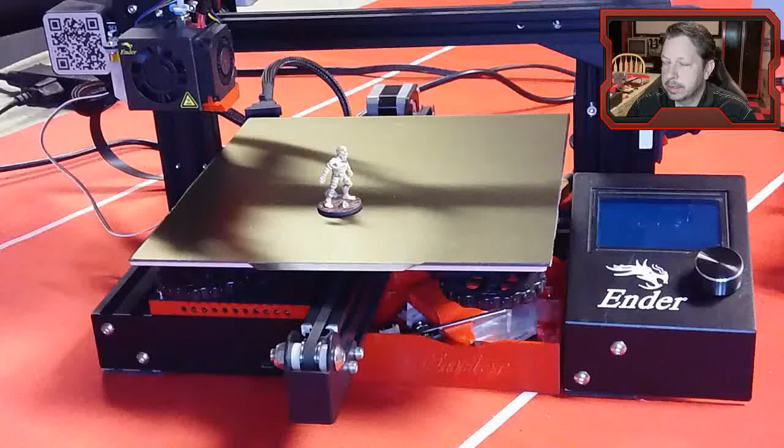All right, I think we've got a couple of new things for today. We're going to look mainly at joining pieces together. We'll look at our little guy that we made last time. I painted him up just to see what he would look like.

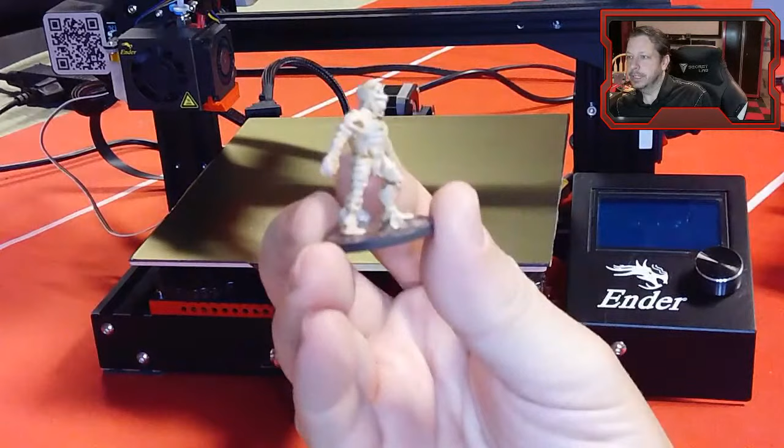He did work out, except our support material is a little bit too close. Remember, he had to be supported, like his arms needed to be supported. There he is. His arms had to be supported so that they wouldn't just print in midair.

Removing that support material was a little bit tough, so we're going to need to make some adjustments to the distance between the tip of his fingers and the support material, because right now it's printing just a little too close, and it caused him to break.

I did glue him back together, which actually fits in with what we're doing today, because we're talking about different ways you can join your prints. Not all of them are gluing, but for this guy, not much you can do, because where he broke, you can't really tell too much.

He broke right down there in his leg area, down in there. You can kind of see, I guess, maybe, you can probably see the one on his back foot back there, a little seam.

But he's a mummy, so it doesn't really matter — that's a good thing about printing mummies, is they don't really get too bad when they're all torn up.

It did work though. We just need to adjust our support settings so that they're a little bit easier to remove, because these were a little bit too tough, a little too dense.

But this is kind of the thing there where we didn't paint the bottom, that you can do pretty easily. That was in our mesh mixing exercise, where we just took some models we found off of Thingiverse, mixed them together, chopped them up a little bit, and now we have a new piece that we didn't have before.

So those are the kind of things you can do with mesh mixing. You don't have to be able to create geometry from scratch, go into SolidWorks and create things, or go into Tinkercad and create things. We'll talk a little bit about Tinkercad in particular.

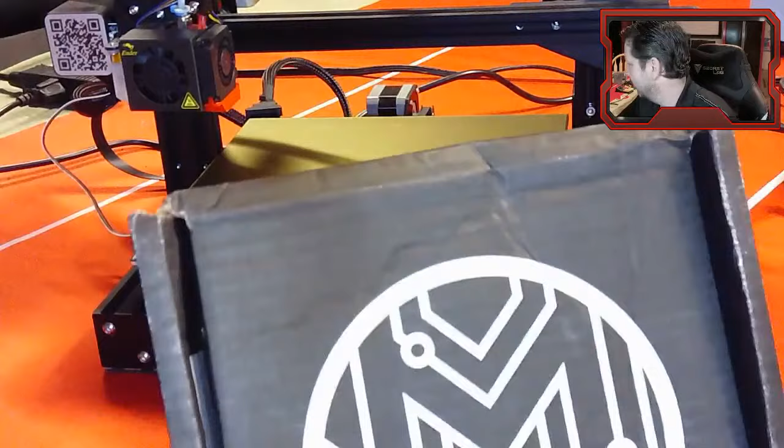I also got another box. It's pretty beat up, but I got another box of sample filament, so I thought we'd open that and see what's inside it. Let's see, where's even the front of this thing?

It's kind of hard to tell now. I think this was supposed to be the front. There we go. All right.

So this is how they normally show up — let's see if we can get it in there. There's usually some announcement about, oh, this is the program where if you refer three people, you get a free box. So this time we have ABS low odor. I've never printed ABS low odor, so I don't know exactly what that is.

The temperatures are a little bit cooler than what you would normally find with normal ABS. Normal ABS you usually have to print a little bit hotter, or at least at the upper end of this. It doesn't list a bed temperature — that's interesting. Normally with ABS you have to have a heated bed for sure, and heated chamber even.

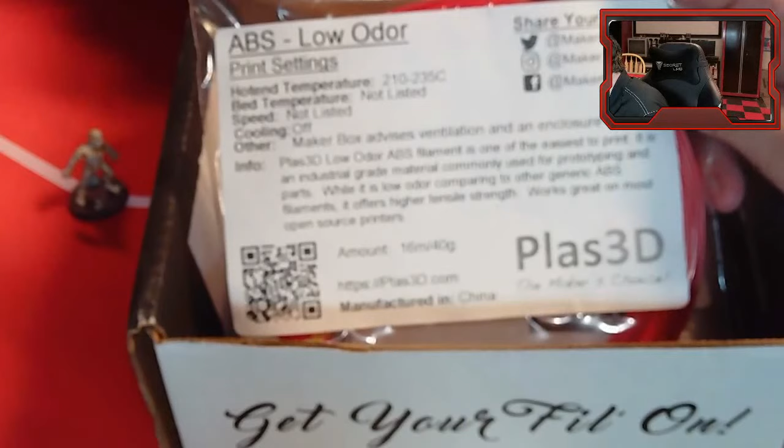It says it's easy to print, and it works great on most open source printers.

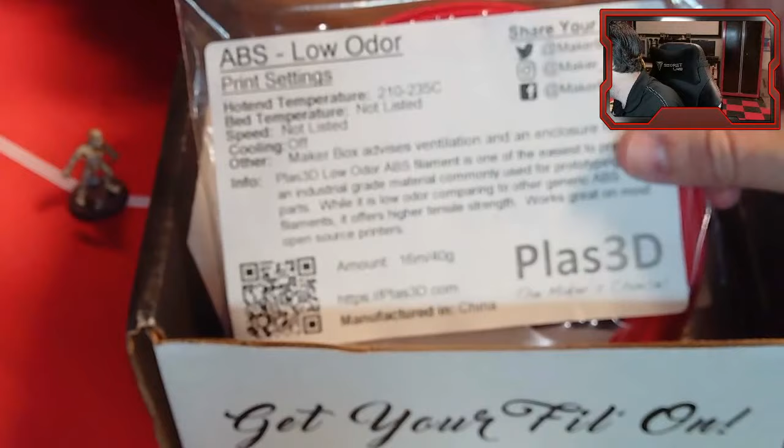I don't know, maybe we'll try that later on and see. I don't think so — the ABS stuff is generally kind of tough to print in a chamber that's not enclosed, which our Ender 3 is. Let's see if we can get that to focus a little better.

Oh, here's some PET material. This one's printing pretty hot, 230 to 250. So the 230 — remember we didn't do a PETG temperature tower. Bed temperature is pretty high too.

So to print this, according to their numbers here, it's going to be at the upper limit of what your Ender 3 can do, at stock anyway.

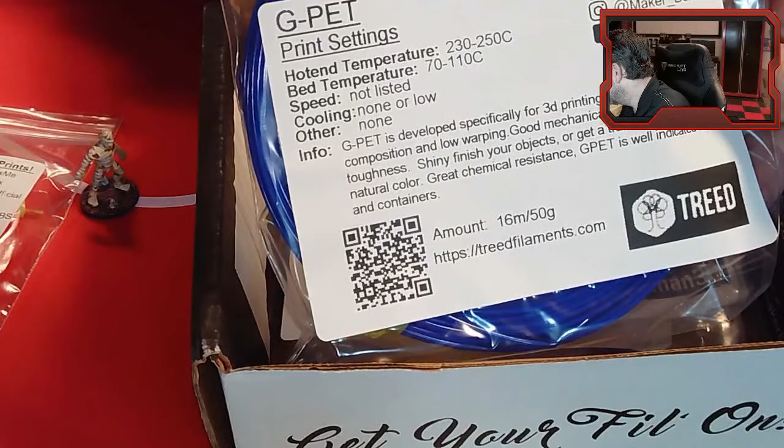Odorless composition, low warping — they misspelled strength. A shiny finish, which is kind of typical of PETG, or in this case it's GPET.

Translucent look with a natural color. Well, interesting, we got a sticker. Oh, here's a clearish one. I've not heard of this one, Alloy 910.

This one's printing pretty hot. Now this one says 45C with PVA. What that's talking about is it might need a support material, or I guess they're saying... this is interesting, it says PVA glue stick will work.

Okay, I read that as will not work. All right, so PVA is basically meaning Elmer's white glue type stuff, and the glue stick will work. Just most glue sticks are also PVA. So it's saying you need that as a release agent or an adhesive, I don't know which one. Probably a release agent between the print and the bed.

Let's see, the goal was to provide a super material with very high tensile yet sufficient elongation. So basically it's pretty tough material. It says it has 8100 psi tensile, I assume that means tensile strength. That's, you know, decent for a printed part. Actually that's really good for a printed part. Now this does not necessarily mean that the layers adhere that well.

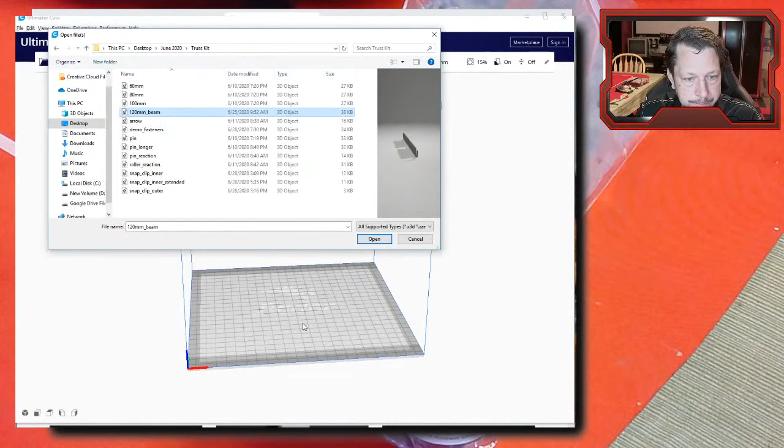Let's find a part. Where did I put one? I think there's some in here, in these truss pieces. There, yeah, that'll work. All right, so here's a little part. Now it's turned the wrong way right now, so we need to rotate it flat. Wow, I'm having trouble moving it. All right, there we go.

Now in our slicer settings, there are build plate adhesion settings, and we just have it defaulting to skirt. That's the one—well, I'm going to show you what it is. It won't take long to slice.

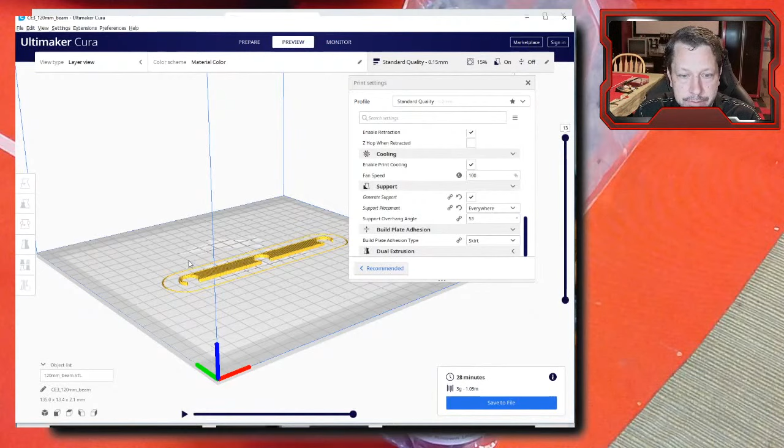All right, so if we look in preview, the skirt is this outer little circle, this couple of laps it makes around the part. You can use that one. It doesn't help with adhesion at all, but it helps you purge the nozzle and get your bed fine-tuned, maybe adjusting the bed level knobs or baby stepping or whatever. That's what skirt does. Let's go back and change it to brim.

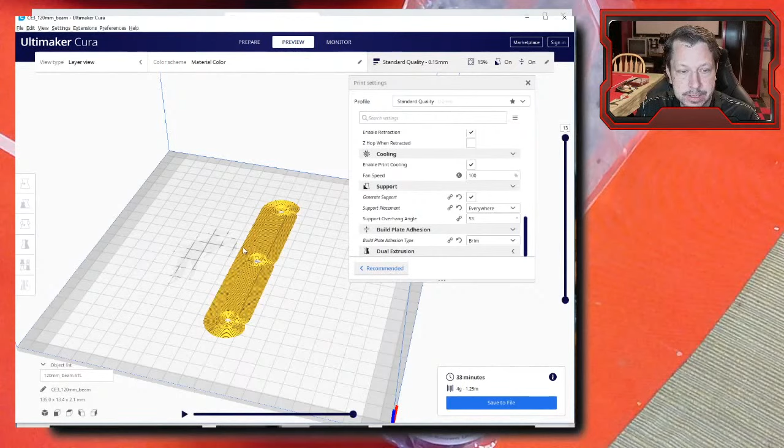And there's raft—we'll talk about that in a second too. Raft can also help with adhesion. So here's brim, and see how now there's all this area connected to the part. That can help with adhesion also, just having all this other material to contact the bed. But also, if you see this thing start to peel up, you can literally tape across it as it's printing and hold it back down.

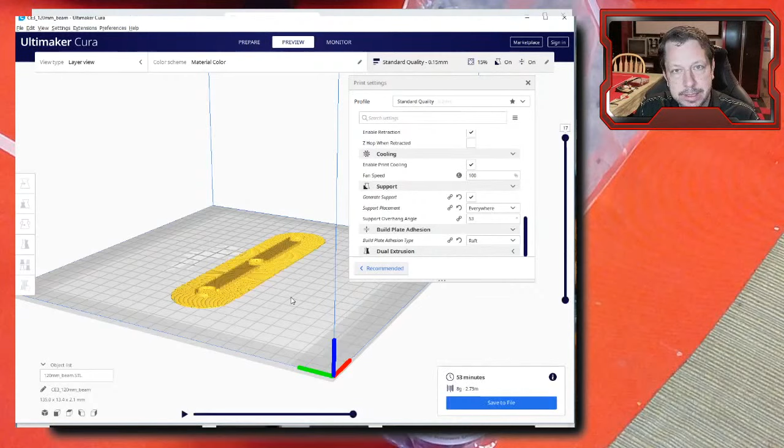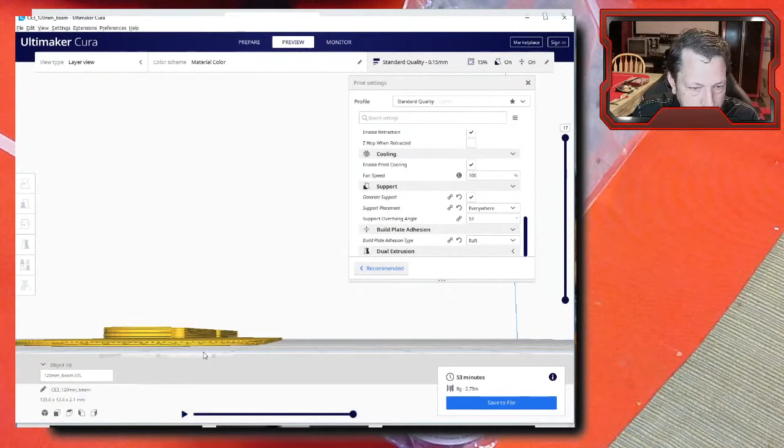Since we're here, let's look at the raft also. If you're having trouble getting your bed flat, this looks a lot like the brim except wider, but there's actually several layers to it. You can see here I've got 3 layers, or actually 4 layers. I assume there's an option to tell how many layers. But what they're doing is building an entire surface to print your part on. So this gives you a long time to get your bed printing and your extrusion rates right.

But it also kind of levels this section of the bed by printing directly on it, and all the unevenness happens in the raft that you're going to throw away later. So your print happens on top of the raft. It does add a good amount of time—look, we're at 53 minutes with the raft.

Without the raft, with the brim, we're at 33 minutes, so it added 20 minutes plus a good amount of material. We're at 4 grams with the brim. Let's see how many grams of material we're at with the raft. 8 grams, so we doubled the amount of material we're using. This is a pretty thin little part, but it does add a decent amount of material and time.

But if you're having trouble, it is certainly a way to basically level out your bed by printing on top of it, knowing you're going to throw away this piece that might be all sorts of unlevel and have ugly finishes on it, but you don't care because you're going to throw it away. You're just going to print on top of it and then throw it away.

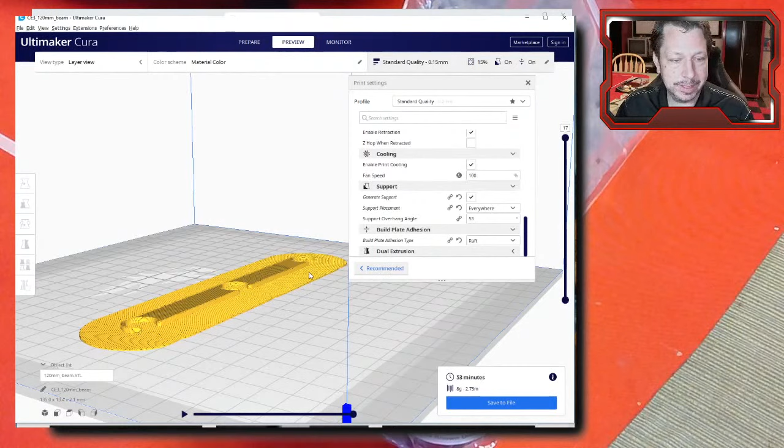All right, so let's see. I don't really have a lot of protective gear on, but I'm in a pretty well ventilated area, so let's just see if I can find some stuff that we might use, if I can get all the screens to go away. Let's see which other one is in the way. Oops, not that one. There, all right, we got them all.

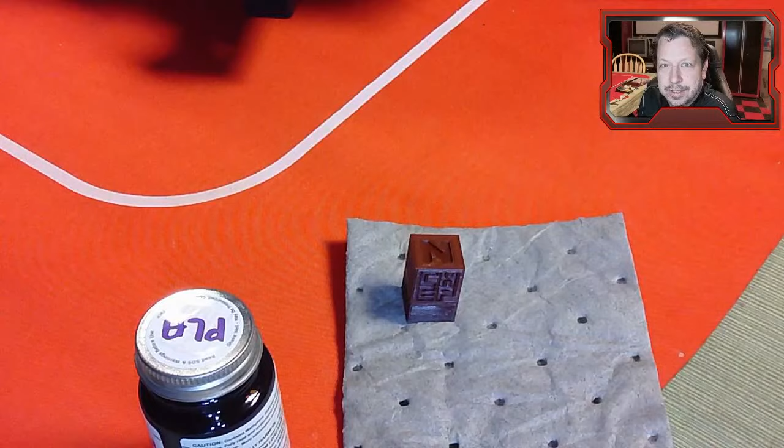Nothing in particular, basically. Oh, I was supposed to shake it. There's not much shaking happening there. All right, so it's tacky enough that it holds itself in place, and it felt like it was one of those types of glues that actually goes in and does melt the material. It doesn't tell me over here how long really for it to set up, but we'll come back to it in a second and see what it's like.

Now again, this is an older one, I don't even know if it has a date on it. No, it does not that I see. But this is one of the original, I can't remember if they did a Kickstarter or what, but it is one of the original bottles of it, so it could be that it's going to need a little more time than what they currently offer. It didn't smell though. I didn't smell it directly, but it didn't have enough vapor that it was bothering me from here.

It's pretty solid, I don't know if it's completely set. I could rip it apart. I do see where it would delaminate, but it is certainly pretty solid. We'll let it sit a little longer. You should clamp it. In fact, let me get a clamp and do that.

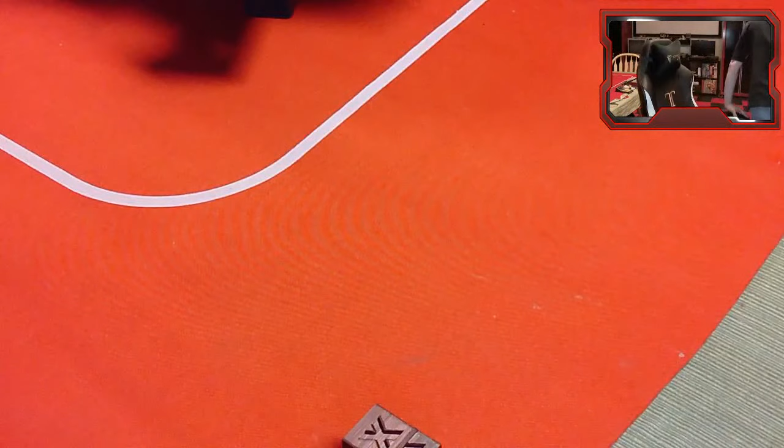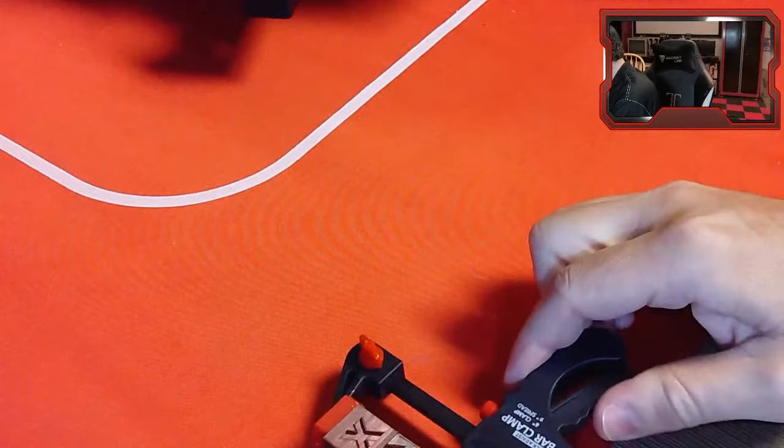Here we go with these little clamps. Most adhesives that melt things generally do well when you clamp them together. Of course, if you clamp too hard, if there are things that are melted, you might squish a little bit. So that's one thing, PLA Goop.

Here's another one, this is Plast-I-Weld. It's the same type of thing, but much thinner. It's very watery, whereas the PLA Goop was really thick. This one is more for very precise types of things.

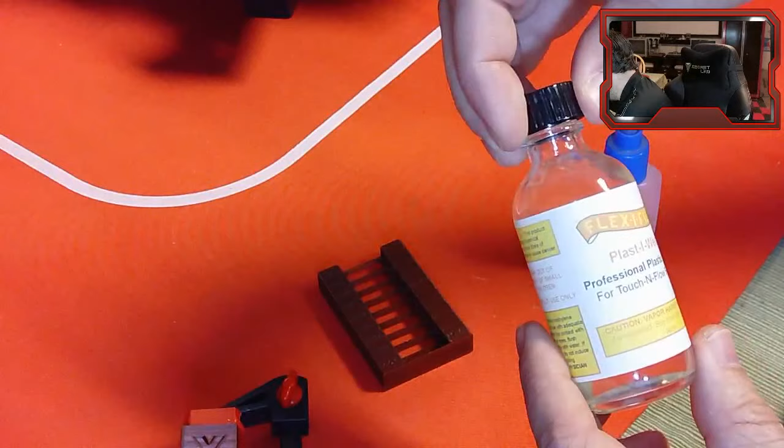Let's see if I can find some other thing. We've got our temperature tower, maybe we can glue it on there somehow. Now this one also is older, it didn't have a date that I see on here, but I know it's pretty old. It works in a similar way, except that it's much thinner. So this one is not specific to PLA, whereas the other one is PLA Goop and specific to PLA, but this one will do the same thing for melting plastic in general.

I'm squirting it back out now, and then you can use it as an applicator. I don't know if I want to try, it's very finicky to get to flow out the way you want it, but it would glue similar to the way the Gloop does, just a little more generic and useful. I haven't tried anything like the PLA Goop on anything other than PLA, but the Plast-I-Weld works on a lot of different types of plastics.

Let me show you a different kind of glue that you might run across.

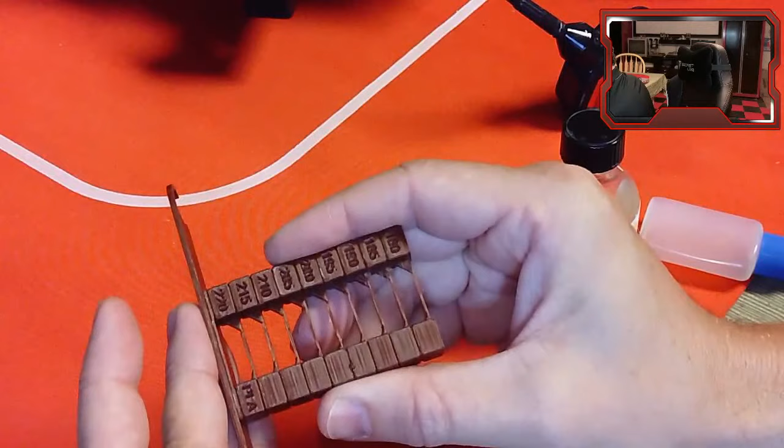Let's see if I can find... we'll just try and bond it to this, it'll be fine. So you can kind of feel that it's adhering, but a lot of times it doesn't give a very good bond. We'll let that sit and see how well it does.

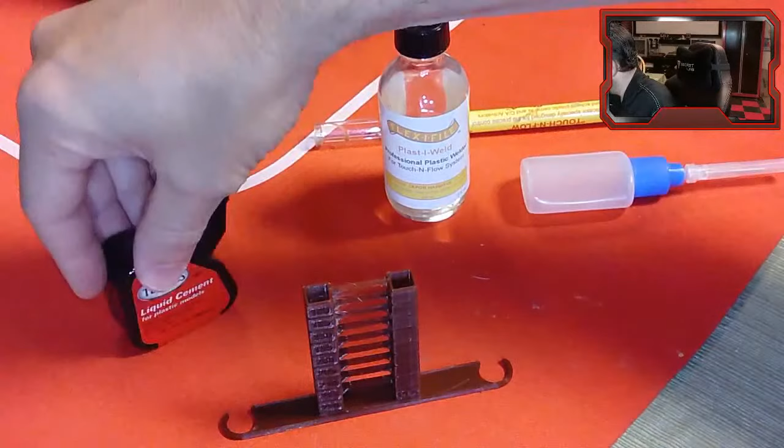There are other versions of this that don't work as well. That one actually seems like it might work. So there's all kinds of glue you can use. I don't have a super glue here just because I don't have any that's not dried up. That's the problem with super glue, it dries up if you don't use it within a reasonable amount of time. The good thing about super glue is it does not melt the parts together, so you at least have a chance of breaking them apart later if you want to.

Whereas this thing, by now, I mean, you can see it separating there at the corner. Remember, I didn't coat the whole surface here, so these corners are not actually bonded together, but that middle part, pretty sure I would have to rip one of the layers of material one way or the other for them to come apart now. Let's let that one sit a little longer.

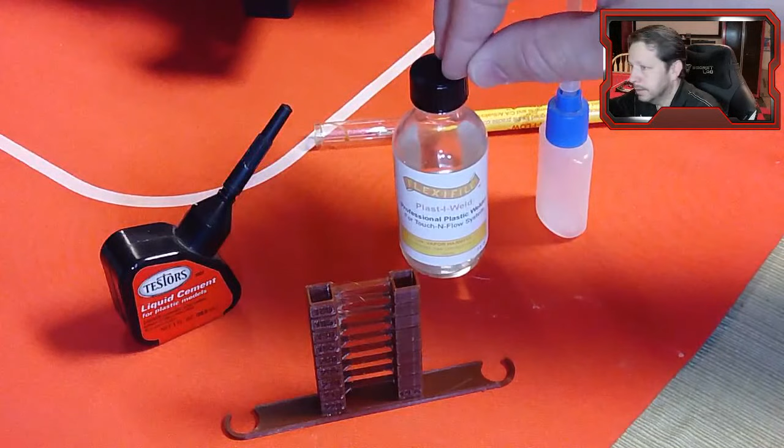Same thing with this type of material. It bonds the material itself together versus gluing it together, so it's going to have a hard time ever getting apart if you wanted to. So these are probably permanently together, or we're going to have to break one of them to get them apart. Let's see what happens. Actually, I don't even know if I can get it apart.

There we go, all right, so we actually did get it apart, but you can see that we didn't coat the whole area here, we only had a little small area. It's still a little bit tacky. So I think if we had coated the whole area and glued this thing together and clamped it, we'd probably have had a pretty tight bond between these two. But, you know, it does look like it didn't completely finish. You can kind of see in this discolored area where there's a little bit of melting going on.

Let's see what happened with this guy. Yeah, see this, it just doesn't do anything because it doesn't actually melt the PLA. That was the liquid cement. It gets you tacky and it will kind of hold things in place, but I don't think it's ever going to bond it together.

So most of these type cements and model glues just aren't going to hold PLA together. This guy will—this is what's holding the mummy together. His leg broke in two places, including here at the ankle, and I used this glue. It's really nice for small models because it has a tiny applicator that lets you get exactly where you want it. You don't want this stuff everywhere because it melts the plastic, so if you get it all over, that's just going to be a big melted glob of plastic. The tiny applicator lets you get it in just where you need it.

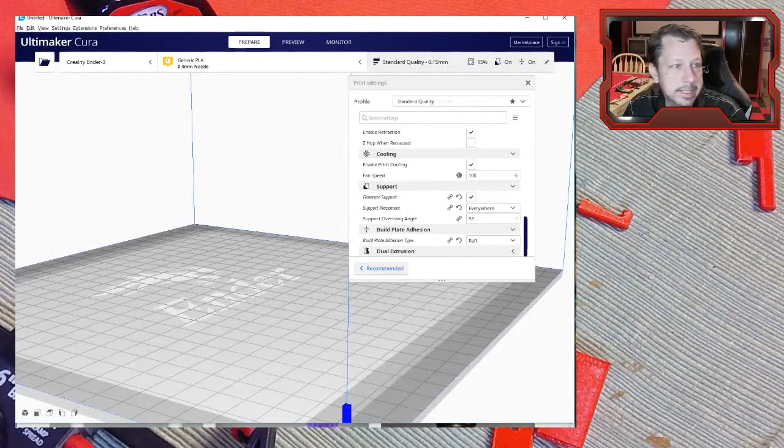Let's see if we can look at a couple of these pieces. Let's see, they're in the same... I think here's the longer one.

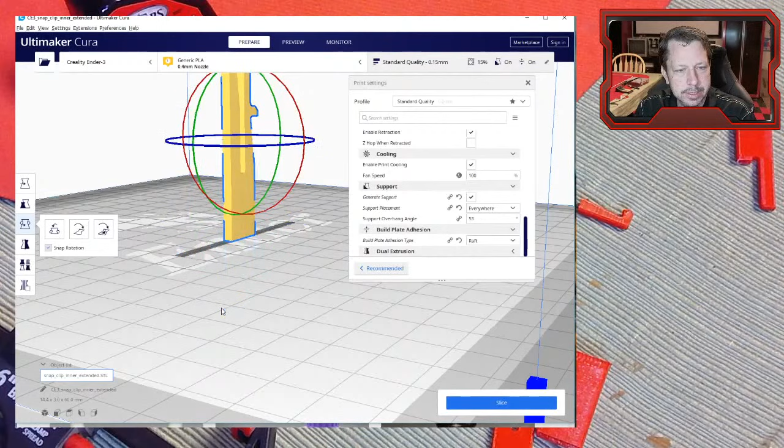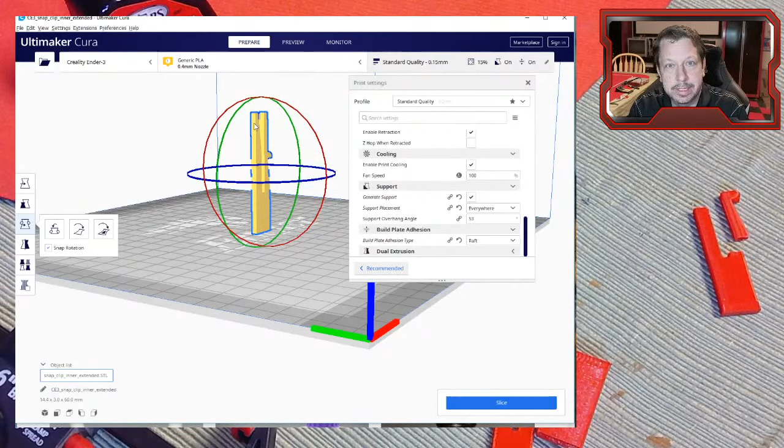So now in this orientation, I don't know why you'd print it particularly this way, what you'd gain by printing it on that end. You just don't want to print it this direction because all of your layers are going to be in the same direction as you're trying to move the part, and it's going to shear very easily, just like our piece did over here, where this would be called a shear failure, where it just sheared directly across the layers. The layers are generally weak parallel to their grain, I guess you want to call it.

So let's lay this thing down flat. Let's make sure we're on 2 walls. We should be. Here it's called shells in Cura, and there's wall line count of 2, wall thickness of 0.8. Those are directly related to one another. If you have a 0.4 millimeter nozzle, which is the default on most all printers you're going to get, then 2 of those walls would be 0.8 millimeters.

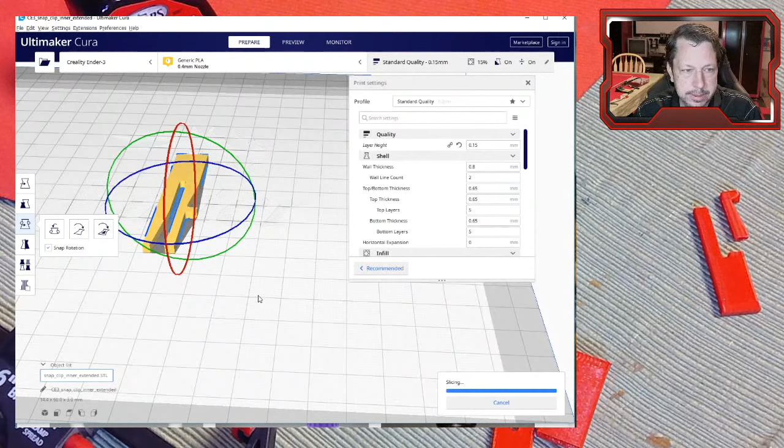So let's slice it, and let's go into preview and see if we can see our walls. Oh, we still have that raft turned on, but there you can see the walls. Let's get that gizmo off of there. Let's get all of the gizmos off of there. There we go, so you can see the walls.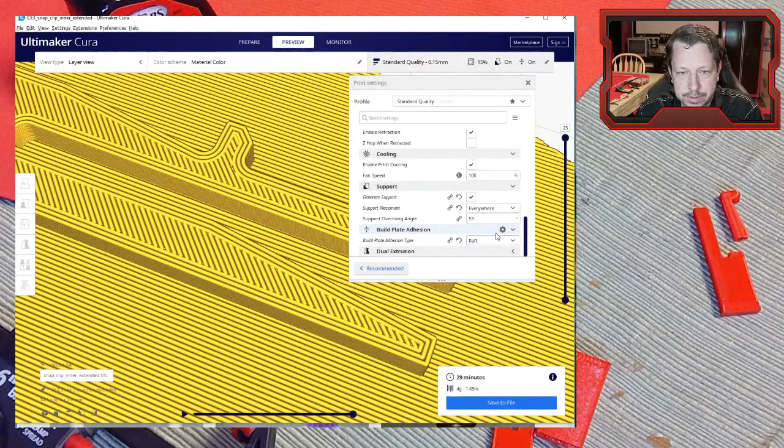Actually, let's turn the brim off, or the raft off. We'll do a skirt instead, it's getting too confusing. All right, they're much easier to see.

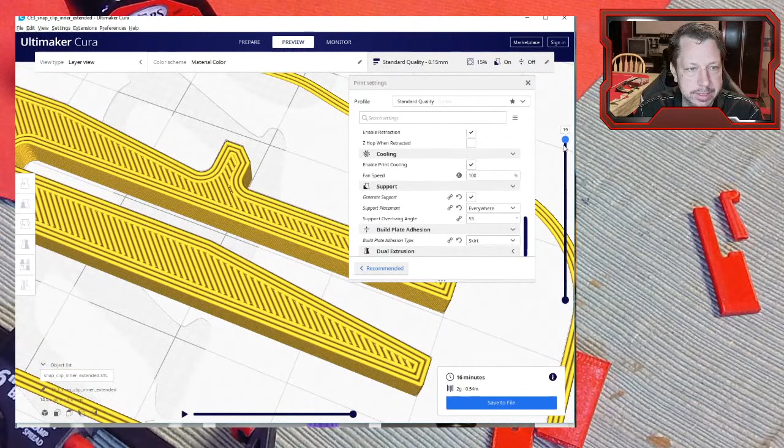Now, it might look like there are 3 walls, but there's actually only 2 walls. This innermost wall, if you want to call it that, is just the edge of the infill. Oh, actually, this is the top layer. Maybe we can see it better on the infill. There we go, now there you can see the 2 walls. This is a very low infill part, so there's almost nothing inside it.

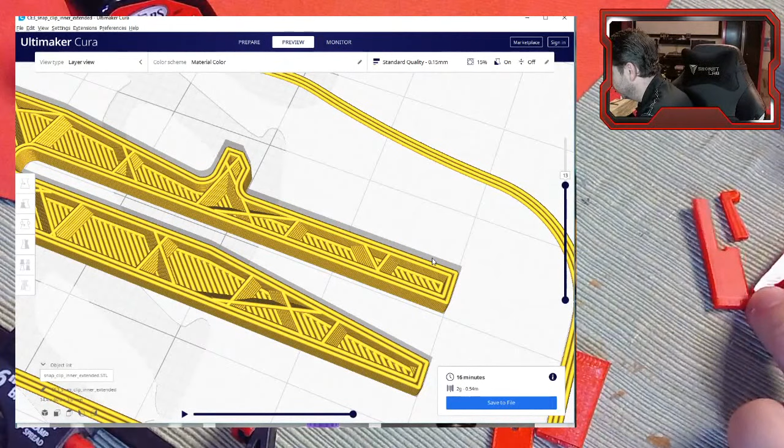And all of your bending is happening in tension. When you push over here to close, to bring the hooks closer together, you're pushing it in. Then these top layers over here are being stretched out, they're being put in tension, whereas on the broken one, those layers were trying to do that, but it just broke across an individual layer. Here, it would have to break both of these strands by pulling them apart, which is much harder to do. The bottom ones are in compression.

They are also helping, but as far as I know, there's not a way to only put a certain number of walls on one side and not the other. There might be some tricks that can make it do that, but there's not a thing that automatically does that. So you can see the 2 walls. Here's that narrowest part—there's 0.8 millimeters of wall on top, 0.8 on the bottom, and we could have probably made this a little thinner if we wanted to. I don't know why I made it the particular dimensions that I did.

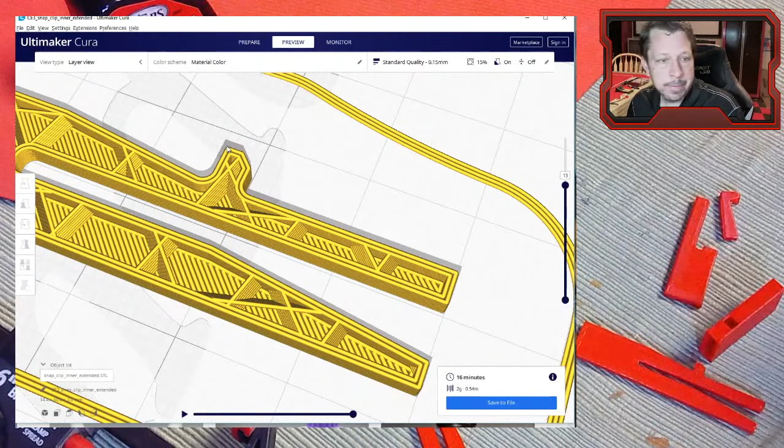The important features are that you have this lead-in angle. It could probably be a little larger so you're not encountering this step right away, having a little more slope, but about a 45-degree lead-in so that your notch will not get caught on the edge of whatever it is you're trying to insert. And then you want a pretty much 90-degree feature on the back to catch inside the hole there. And then these radiuses, these curves here—in this case, I think they're 1 millimeter radiuses—you want those so that you don't end up with sharp corners.

Anytime with any kind of mechanical part, whether it's printed or injection molded or whatever, if you have sharp corners, then you're going to create what's called a stress concentration at that point, and it's going to do exactly what its name says—it's going to concentrate the stress, and the stress is what makes the parts fracture and fail. So if you have a very sharp corner there, that's going to be a location for a likely failure.

Here we've radiused it, made it a fillet, which makes it less likely to have a stress concentration. It will still have some, though. Anytime you have a change in area from one size to another, you'll have some amount of stress concentration.

Notice also that it's tapered. It starts out wider and then tapers narrower. That also helps because it doesn't have to bend as far to get as much clearance as you have on your hook that's going to go into the recess on your part.

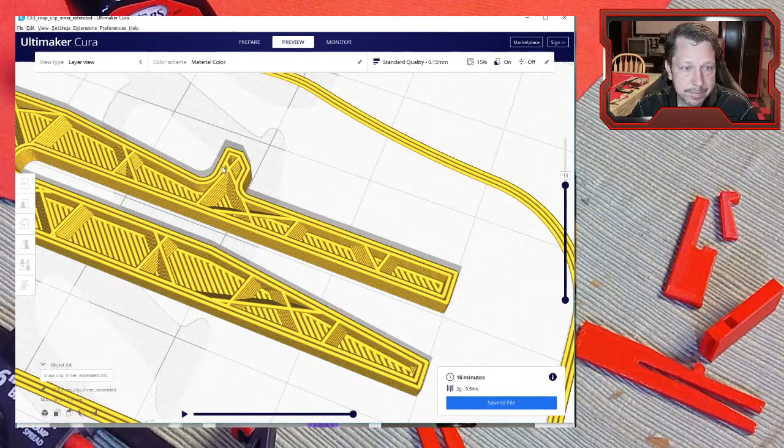So you can build these into things like little snap fit lids, as long as you're careful about the orientation you print the part that has to move. This part I actually printed standing up, just like this, and it should be fine this way.

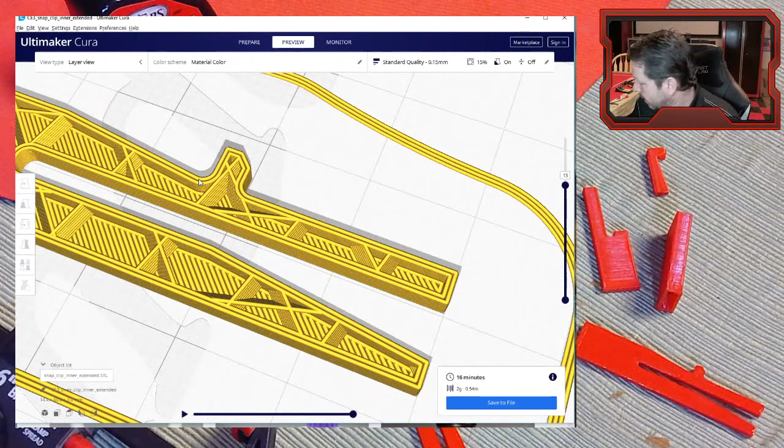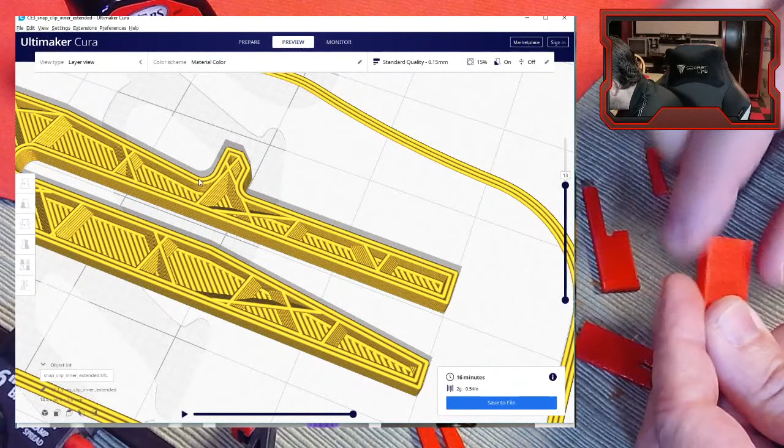In fact, it would have been difficult to print any other way because it's hollow, right? It would have had a good amount of bridging to do. We probably could have printed it this way and only bridged across here, but this part doesn't have a lot of force trying to shear it.

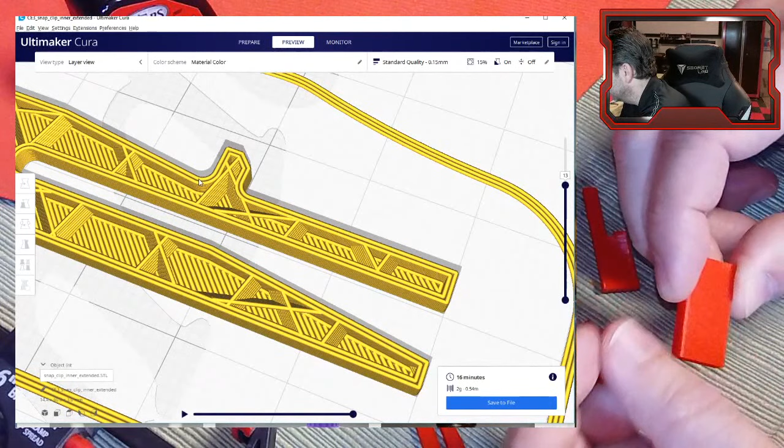If anything, whatever it's attached to would be trying to pull it apart, which there's still a lower amount of adhesion for between layers, but they're really weak when it comes to shear stress, going across the layer and making one layer slide past another. The printed parts are really weak in that type of stress.

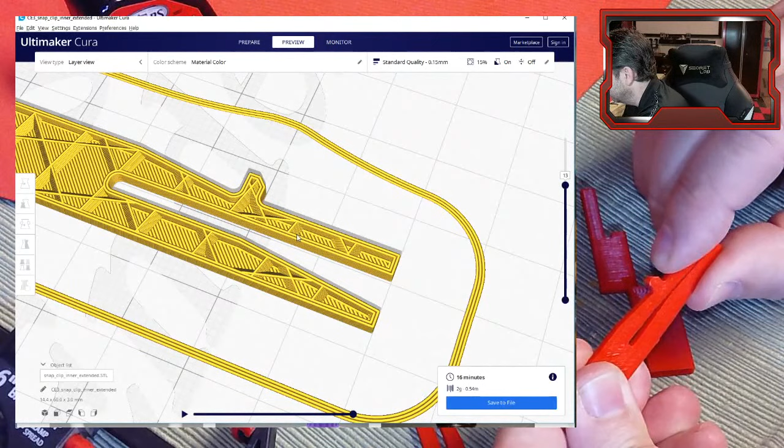So you can build these, and eventually they will wear out, although these probably aren't doing so much moving that they'll ever be a problem until the material itself begins to degrade, but that could be years. PLA is biodegradable.

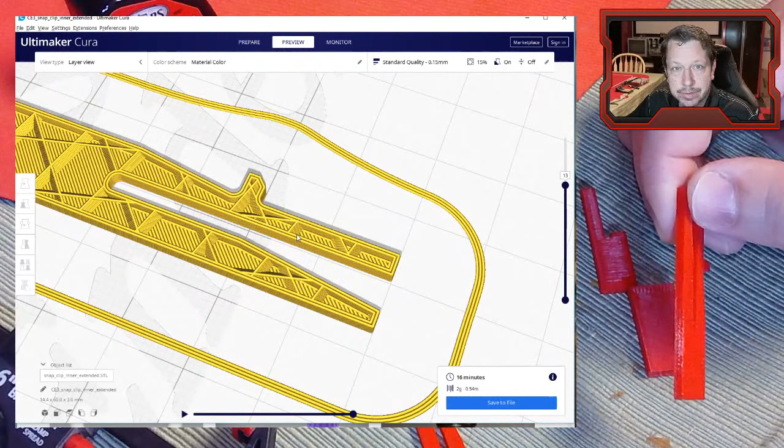A lot of these materials, including PLA, are a bit susceptible to UV embrittlement, so they get brittle if exposed to UV light for hours, days, or months. I haven't done actual experiments to see how long that takes. ABS is particularly bad about that. PLA is probably somewhat bad, but it should still be years before you have problems with this under normal use.

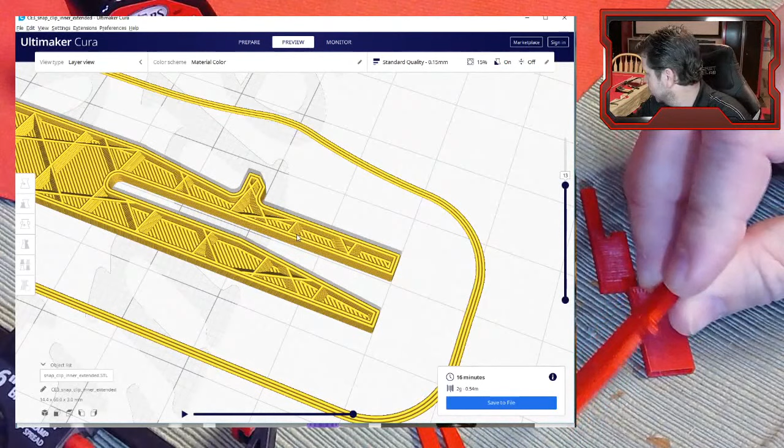Let's look at a couple of other things. Here's a common one - actually two things in this common example. Maybe you want some metal threads that you're going to screw some sort of fastener into. So here's what I've done, I'll show you - yeah, it's over here.

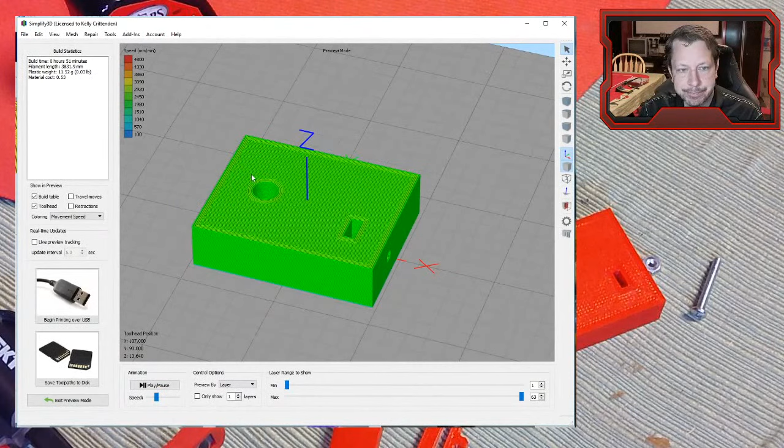This is Simplify3D, a different slicer, just to show you an alternative. So here's the part that we have right here.

You can see on this one I did 4 walls, all around here, because these I want to be mechanical - they're going to hold a lot of stress. These circles are going to have even more to deal with here in a second.

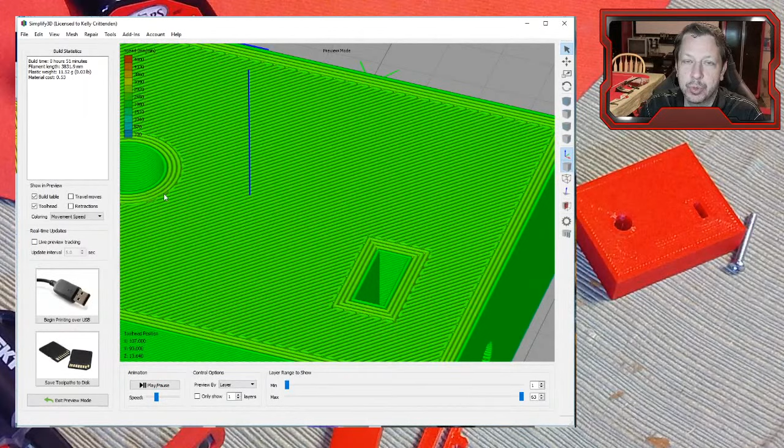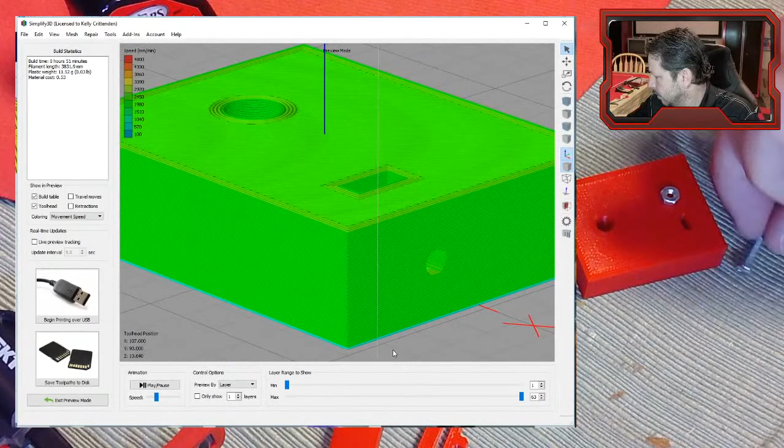Here's the slot I've designed for this nut to slide down into, and then there's - whoops, zoomed out way too fast - there's a hole over here. Now I did print this one, you can see this orientation. There's a hole here that the screw will encounter the nut and then bond whatever it's screwing together.

I didn't build another piece for it. I guess it could have created something for it to actually attach to. But here's how this works: you make, again, I have 4 walls.

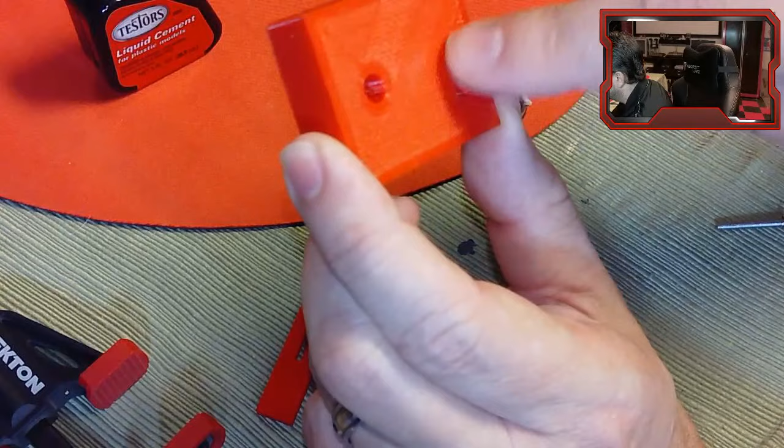Now you can probably see there's a little gap underneath there, so I have a bit of a problem on some of my top layer here. You can kind of see one also around the circle. It'll be fine for what we're going to do, but that's something you might want to work on - getting that top layer to actually adhere to all the walls it printed.

But I dropped it - I made it, measured across the flats of the little nut here, and made this 0.4 millimeters wider, thinking that was our tolerance. So it's pretty tight.

Remember, holes and features like this are going to end up 2 to 4% smaller than what you designed them, just because of the filament extruding into the hole's open area. But it's a nice fit there.

Need to force it down. I think we did it. So it's down in there now. Now I have metal threads in a plastic part that I can screw this thing into, and we should be able to get a decent amount of torque and clamping power if we were actually clamping anything together. I've just felt it engage the screw thread.

So you want the 4 walls so that the edges of the nut have something to hold on to, because it's wanting to turn, and those walls are having to hold it in place while I tighten the screw that it's threaded into. So this would provide plenty of torque and clamping strength for whatever you want to attach there, and you can remove it, so you have permanent threads.

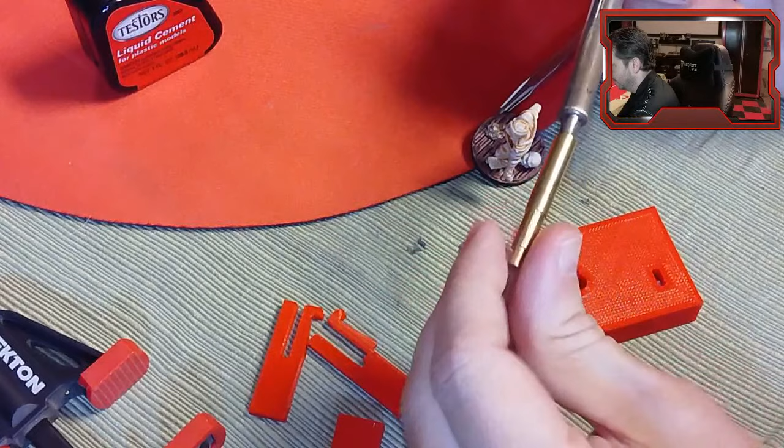You get something like a soldering iron, and you don't have to have this—you can go directly to here and heat set it in there. So it's a little bit tricky getting it to not melt everything and getting it perfectly straight, so it does take some practice. This thing will help because it more evenly distributes the heat versus just kind of dumping it all at once in there. But we'll give it a shot and see if we can get this guy to set in here without too much trouble. I probably need some pliers though to kind of help orient it.

These pliers can act as a heat sink once it gets in here. The problem I usually have with these is that it stays hot for a while, so it doesn't start moving, and you keep adding more and more heat. Then once it starts, it's hard to get that heat back out and cool it off. So I'm going to use these kind of as a heat sink too, to hopefully not destroy ourselves. It won't destroy us, but we might destroy this plastic part.

So I'm just letting it heat up. I've got it at 450 right now. That might be a little hot, but let's actually put it this way.

So see, for a while, you don't have a good way of knowing exactly when it's going to start, but you can see, all right, there it goes. And I did pick one of the largest ones that I have to try this with.

I would definitely do a couple of practice holes before you head off and just try it on your actual part you printed for a long time.

Yeah, it's cooled down to the point now that I don't think I can force it in there anymore. Actually, I can. I might add a little more heat to it and try to get it to finish.

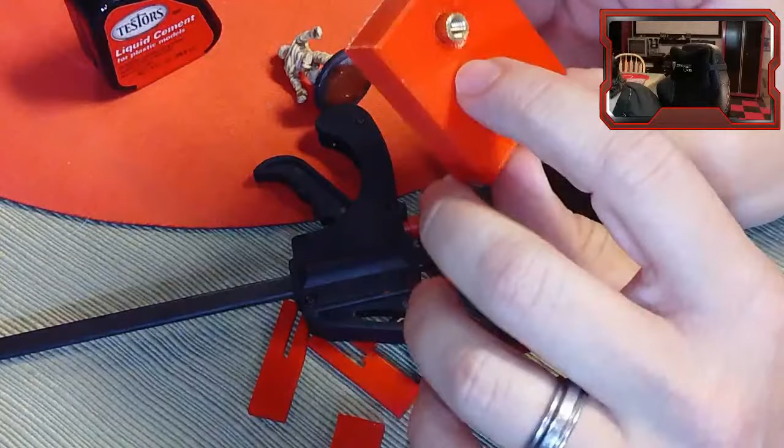But you can kind of see the problems are, it's deformed this entire area around here, getting it hot enough for the plastic. Even with 4 walls, they're a little bit tough to use, but they are an option.

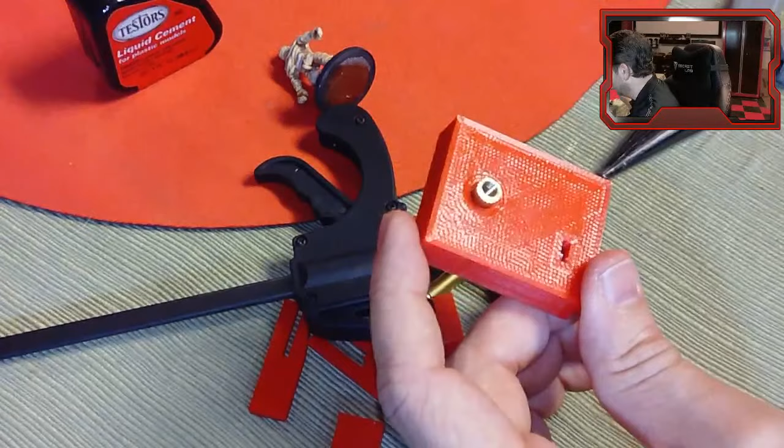So let's get a little more heat in there and see if we can get it to set the rest of the way. We'll do it this way.

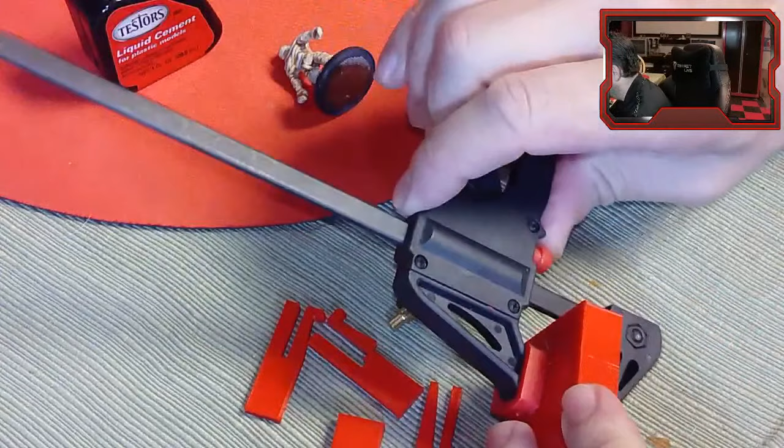Close—just having to push all this plastic out the back too. And if you do too much wobbling around, then there's no material left to actually hold your piece that you're trying to insert here.

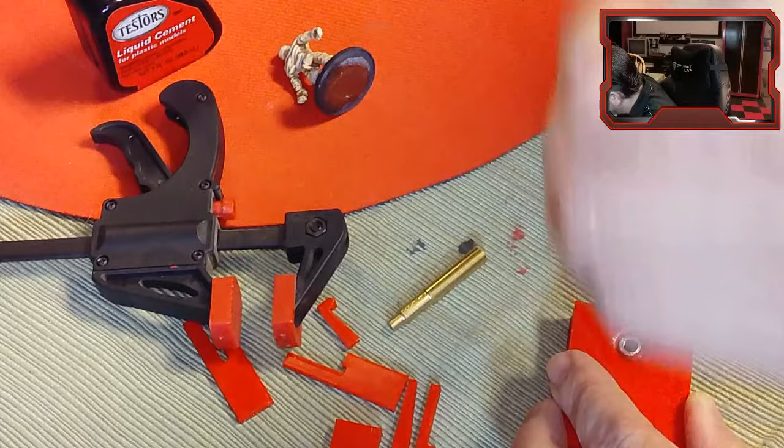So it takes some practice. I don't practice enough with these things, but we did get it in there. I don't know how exactly straight it is. It probably could go a little deeper, but got a good bit of deformation across the top, so we probably weren't quite hot enough.

And we've got a bunch of plastic inside there that's going to be in the way when we go to try to put our screw through there. Let's get that out.

All right, let's see if we can grab it out of there. All right, now from this side we've got some nice threads. The other side is a little bit deformed around there, but now you do have metal threads that you should be able to screw into.

I've got some plastic still in the threads—there they go. So this is another way. I actually think the captured nuts are probably a little bit better, but this is another option.

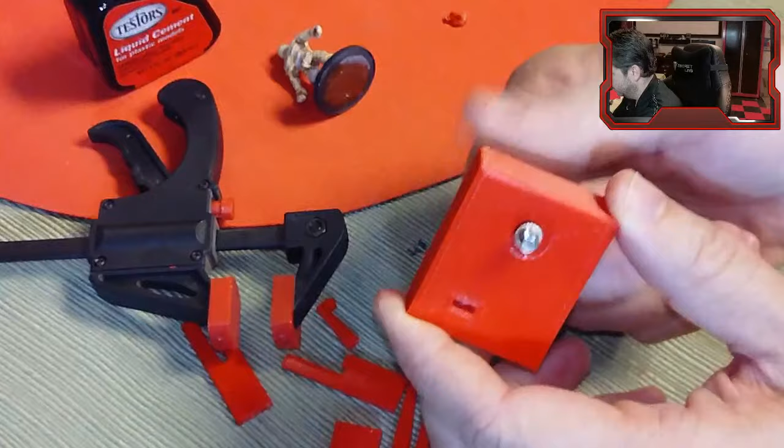Maybe one thing these can be used for is places where you can't fit a captured nut—maybe a boss, basically a cylinder inside of an object, where you don't want a big block of material around it to hold a nut. You can build a cylinder up and put one of these in there.

They are a little bit difficult. You can kind of see it's a little crooked—that bolt is not perfectly perpendicular across this plane. Once you get them in, it's kind of hard to go back and adjust them. If you add more heat, you can twist things around and straighten them up, but eventually you'll just melt the whole plastic around the hole, and there's no holding power left.

So they're another option. I actually like these a little less, but they have some benefits for smaller sizes, because once you get to a nut that's smaller than this one, it's tough to make a hole that's just the right size for it to hold in. Those smaller nuts are—well, this is pretty small, but if you needed something even smaller, you might have to go to one of these type of inserts, or just make the hole itself and screw directly into it.

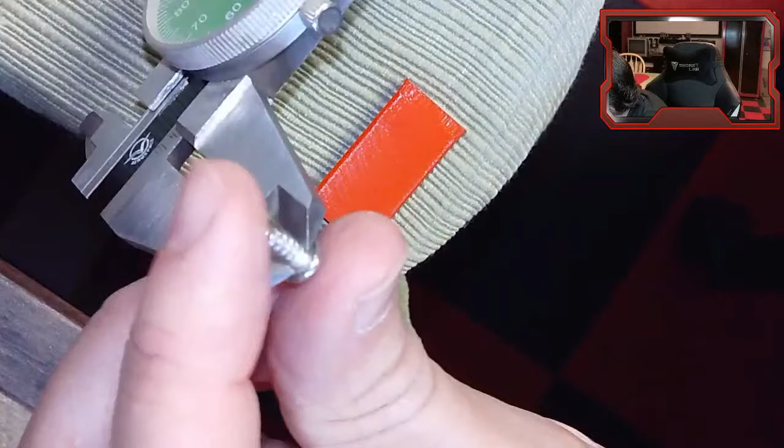In general, with this type, what you do is you measure - don't drop that - you measure the root diameter,

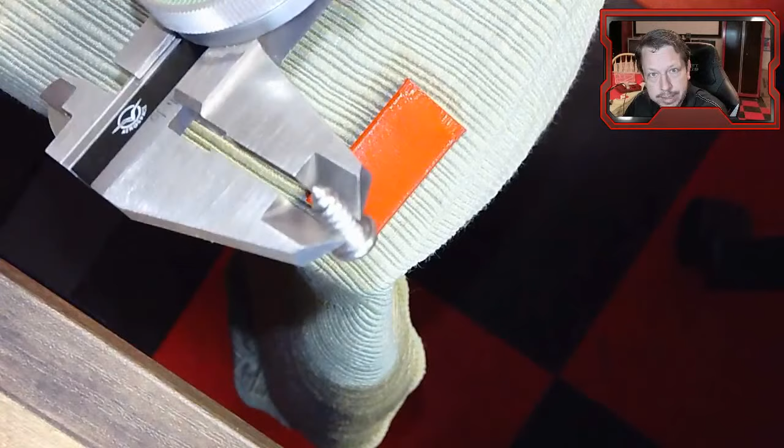so kind of in between the threads, and make the hole that size in the CAD program. Once you print it, it'll be again a little bit smaller, and that should be about the right size hole for one of these screws to thread itself into.

You may not get as many cycles, so you might not be able to thread it, unthread it, tighten it, untighten it over and over again. But you'll get a couple of cycles out before the threads in the plastic just kind of degrade. And you can't put as much clamping torque.

So if it's something you really want to clamp down on, these are very likely to do that up to a point and then just rip all the threads out, and you won't have anything in there. You'll have to go back and put one of those threaded inserts into the hole that it left.

But there are some plastic screws. Let's see if I can find an example. Here's one. Let's see how this one has this big spiral and these relatively deep threads on it.

You can find some screws that are specific for screwing into plastic. A lot of times they'll have two threads, a really deep one and a shorter one. I don't see any of those here, but you can see how deep the threads are on these plastic screws.

Yeah, I don't see the other kind that I'm thinking of, but these can be very handy to have if you're trying to screw plastic stuff together and you don't want to deal with the nuts that you insert or the threaded inserts that are the heat set ones.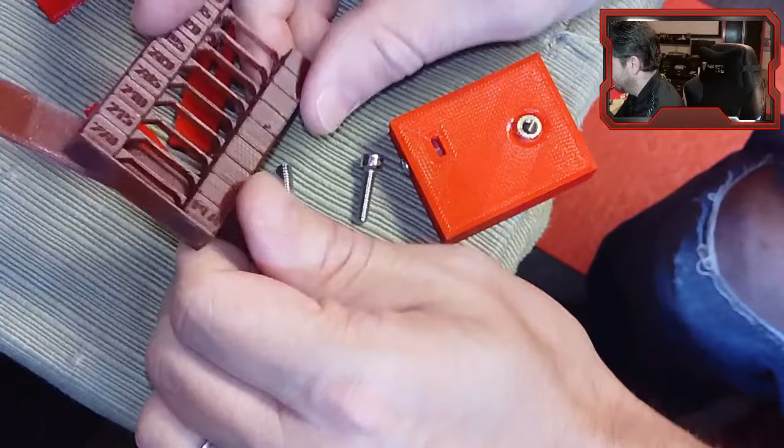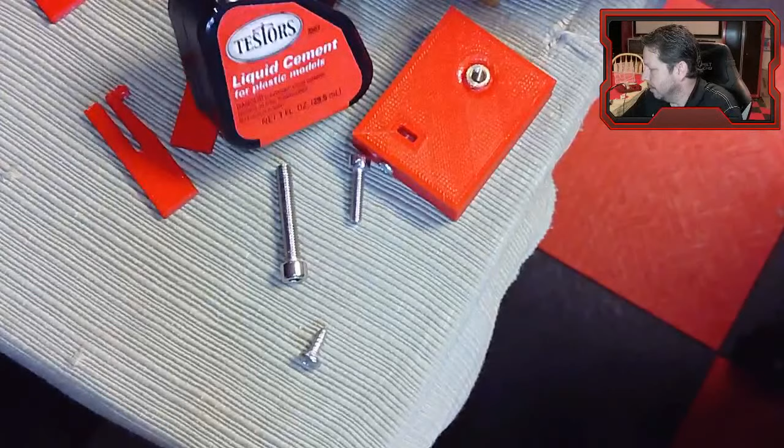See, there's nothing there with the model glue. So you really have to use something like super glue, PLA Gloop, or Plasti Weld to hold these pieces together. The type of glue you might use for building a model just isn't going to hold PLA. Now, I don't know if it holds ABS, I don't know if that's close enough in composition to styrene that it would melt, but PLA certainly does not bond with regular model glue.

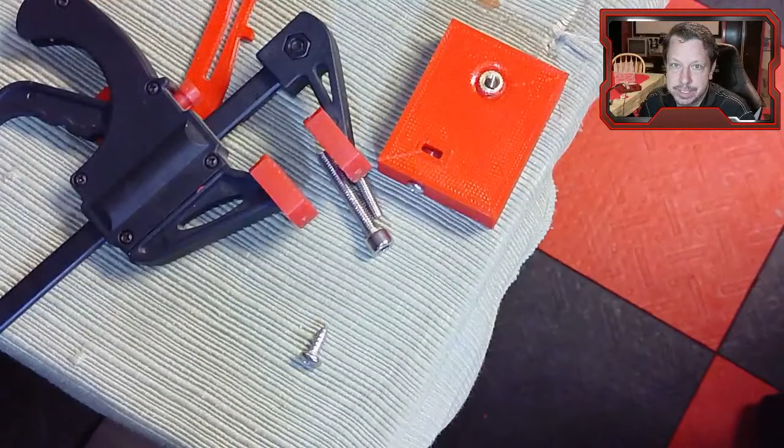So get yourself some, even if it costs $10 or so for a bottle. If you plan on gluing PLA together, you're going to have to use something specifically formulated for PLA, like PLA Gloop, or something for plastic in general that melts the layers together. Clamp them together so it holds in place until it finishes curing, or unmelting I guess in this case, and you should be okay.

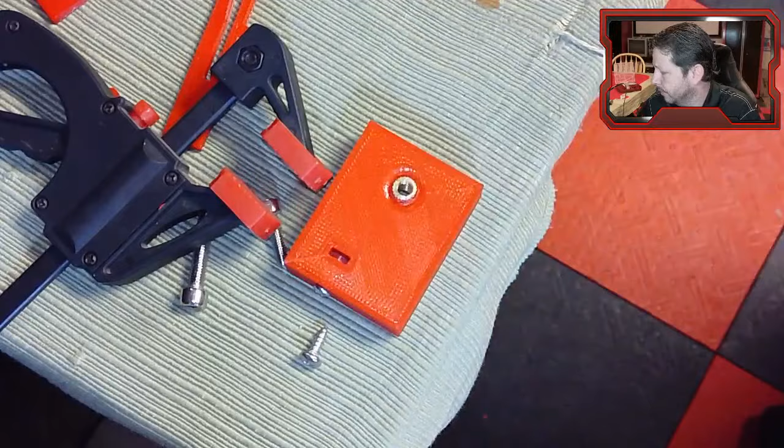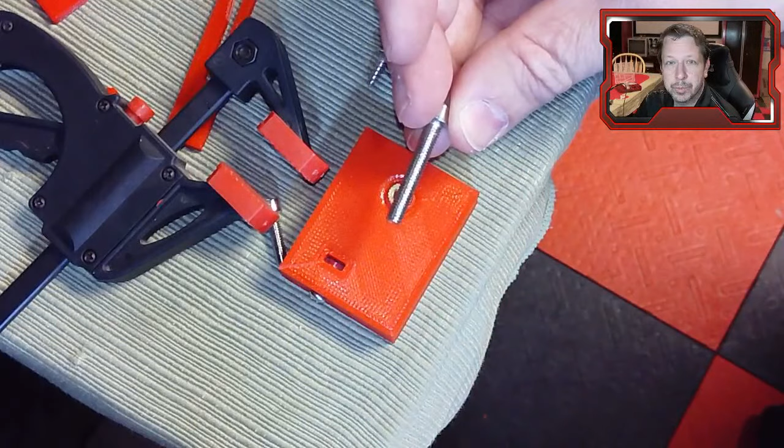Don't forget that you can actually use mechanical fasteners. You can screw directly into plastic with the right type of screws. You'd have a hard time with the screws that come with your printer kit, they're probably not going to do very well for screwing directly into plastic. You need coarser threads, something like this, or get plastic-specific screw threads. In fact, I might order some so we can see just how strong they might be.

I think we're good for today. On Wednesday, we will do some multicolor printing, and I'm going to show multicolor printing that does not require any special hardware. We'll do it through software, through slicing certain ways, maybe interjecting some G-code so we can change out our filament. I will also show you some ways that require hardware, just so you know what they look like, and if you're interested, you'd have to make an investment to get into that other type of multicolor printing. But don't think you can't do multicolor printing just because you have an Ender 3 with one nozzle, you can still do it.

It just takes a little more thinking on the front end of how you're going to do it. All right, that's what we'll do on Wednesday. I'll see y'all then.